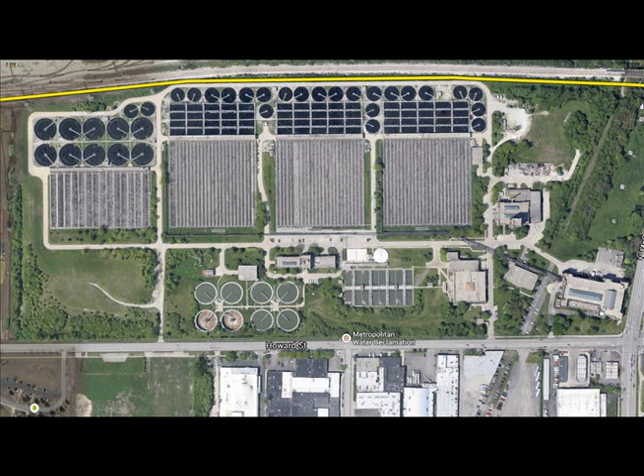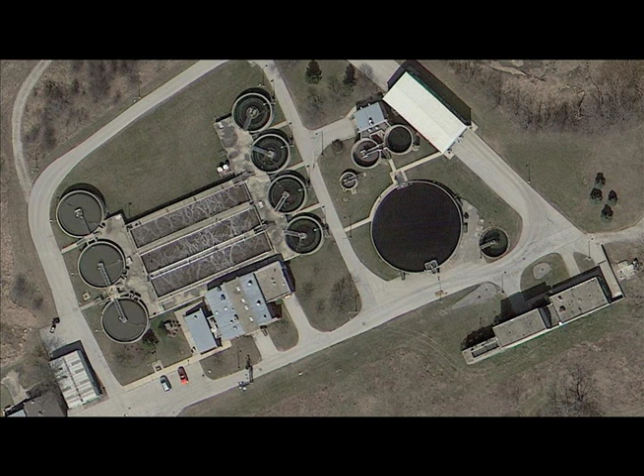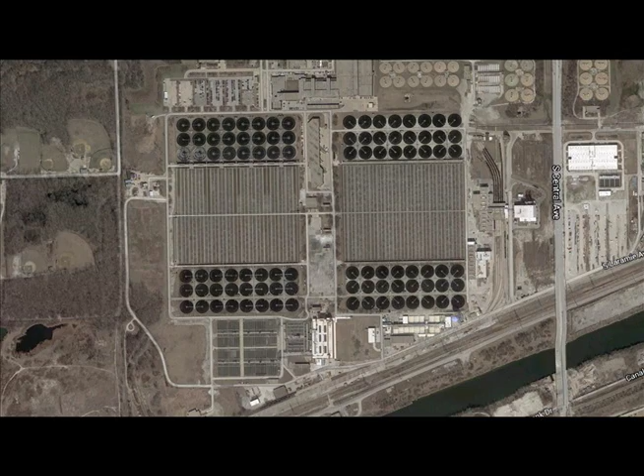The 7 wastewater treatment plants are the Northside or O'Brien plant in Skokie, Illinois, the Kirie plant in Des Plaines, Illinois, the John E. Egan plant in Schaumburg, Illinois, the Hanover Park plant in Hanover Park, Illinois, the Lemont plant, which is the smallest plant in Lemont, Illinois, the Calumet plant located next to Lake Calumet on the far south side of Chicago, and finally the Stickney plant in Stickney, Illinois, the largest wastewater treatment plant in the world.

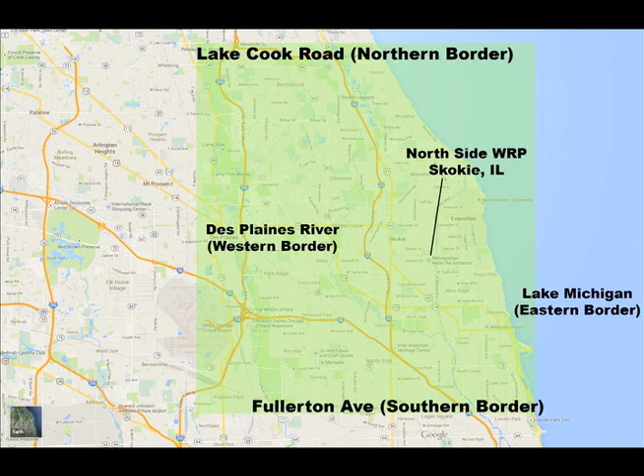The Northside Water Reclamation Plant is the oldest of the 7 wastewater treatment facilities within the metropolitan Chicago area. The main portion of the plant began operation in 1928 and was a model for modern sewage treatment technology as we know it today. The plant serves over 1.3 million people, residing in a 141 square mile drainage area, which includes the city of Chicago north of Fullerton Avenue and the northern suburbs to the Lake County border.

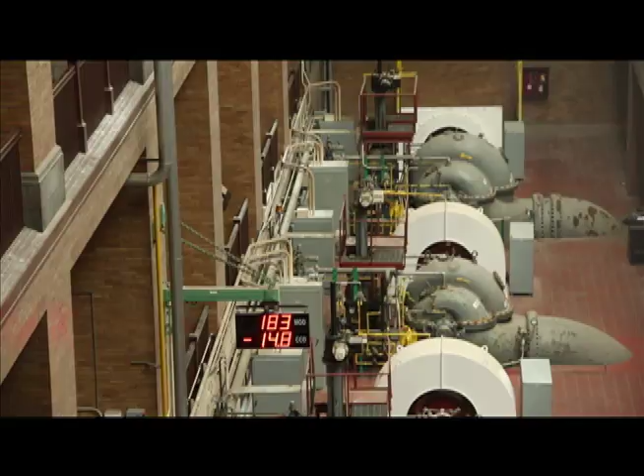The process of treating water goes through the following stages. First, the wastewater goes through a collection system where water enters the plant through the sewer system. Then, the wastewater goes through a preliminary treatment where waste is removed from the water. The wastewater then goes through a primary treatment where solids settle to the bottom while fats and oils float to the top and are disposed of.

Following that, the wastewater goes through a secondary treatment where aeration tanks pump air into the water to clean it. The treated water then goes through the last stage, or the final settling, where solids sink to the bottom and are sent to concentration tanks while treated effluent is discharged into the river and canals.

My name is Commissioner Frank Avila, and we're at the Terrence O'Brien plant, which used to be called the Northside plant. And I'm here with our tour guide, Tom Phillips. Tom Phillips is the person that gives the tours here at the Terrence O'Brien plant. And Tom, how long have you worked at the district? I've been at the district now for about 2.5 years.

And how long have you been a TPO? 2.5 years, the whole time. And what is TPO? I'm a treatment plant operator 1. I started as a vacation relief, and now I'm just a treatment plant operator 1, but I still give the tours here at the Terrence O'Brien Water Reclamation Plant. And Tom is one of the top tour persons here at the Metropolitan Water Reclamation District of Greater Chicago. He gives all the tours here on the north side, and we're going to go through a tour of the Northside plant, or the Terrence O'Brien plant.

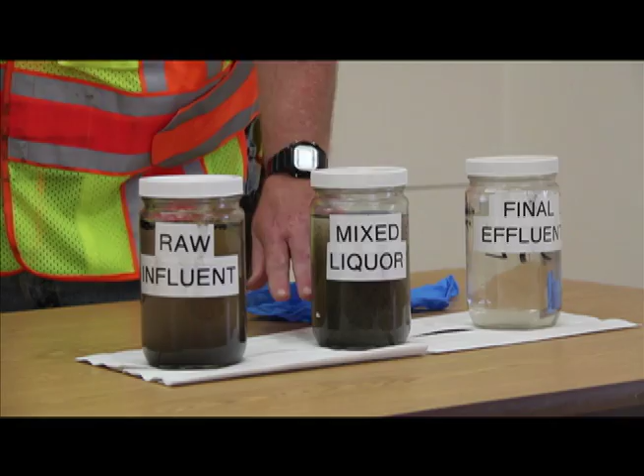We remove the settled material, and this is our final effluent. That's a very, very short version of what we do here, but that at 9:30 this morning is our final effluent, compared to this, which is the raw. It's a very, very efficient process.

Tom mentioned dissolved oxygen, because since we're working with liquid, with wastewater, the oxygen is dissolved oxygen. Whereas human beings need oxygen to breathe, the microorganisms need dissolved oxygen to survive in wastewater. That's why they introduce dissolved oxygen, and that's one of the key portions of treating our wastewater, inputting more dissolved oxygen into the system.

Yes, the microorganisms could not survive without proper DO. So part of my job as a treatment plant operator is to make sure the DO stays consistent and considerably higher than when it first comes into the plant. We're going to go through the various processes of how we achieve this, from the raw sewage to the effluent, and walk around the plant explaining it.

Okay, in this section of the tour I would show a video, a general overview of how the district got started, and I would also have a question and answer session, but that is not going to be the case right now. So I'll just show the video of the water reclamation.

Our goal is clear. The Metropolitan Water Reclamation District of Greater Chicago. For more than 100 years, we have been working to clean and preserve our water and natural resources. By developing technologies to control flooding and adopting policies that will protect the water environment, we make our communities a better place to live, work, and raise our families.

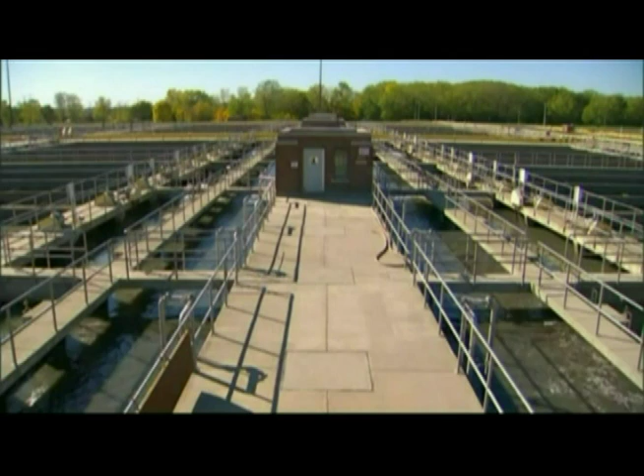The Metropolitan Water Reclamation District of Greater Chicago serves a population of 5.1 million people in the city of Chicago and 124 suburban communities. As an autonomous government agency, separate from the City of Chicago and Cook County governments, we treat an average of 1.4 billion gallons of wastewater every day, 365 days a year.

The staff of 2,100 men and women, under the direction of a 9-member Board of Commissioners elected by the voters of Cook County, includes engineers, scientists, operators, and various labor groups, all dedicated to continuous improvements in the quality of our water and environment.

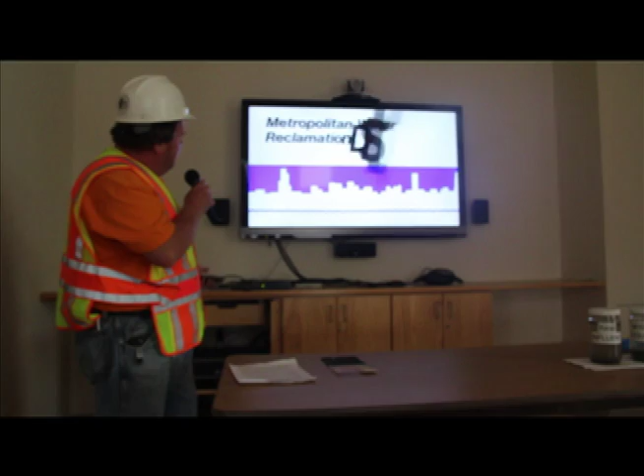Once again, this is a video that we show to all the tour groups. It covers the water reclamation of all Greater Chicago, not just the north side. There's a lot of good information in there about how we started, where we came from, and where we're going in the future.

The district consists of 7 wastewater plants. 3 are considered the largest in North America, and 1 is considered the largest in the world, which is Stickney Treatment Plant. When a tour group comes in, before they leave, I ask them to take some of the handouts we have over here at the Water Reclamation District.

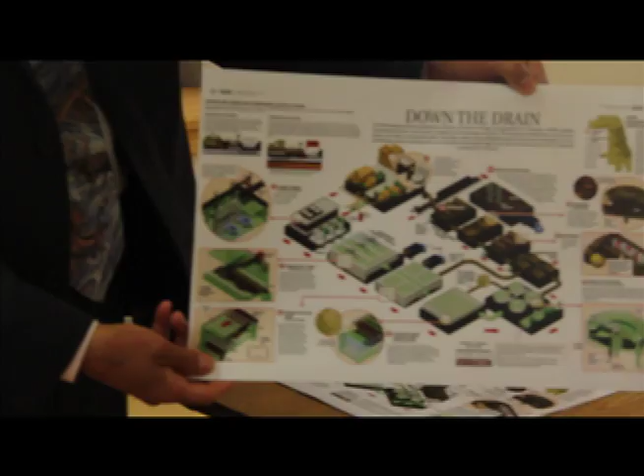This is an overview over here of how any treatment plant will work, not just ours. And this is for the grade schools. Sewer Science, very nice booklet. And then, you know, it's a toilet, not a trash can. And then a new problem that we're having, and I'm hearing a lot about, is drug-free drains. That could be a serious problem in the future, and it's becoming a problem right now.

Yes, as Tom mentioned, the drug-free drain is a problem, and they're always asking me, how do we keep this out of the system? And my answer is stay healthy, don't take it. Eat right, exercise, and if you're healthy, you don't have to take any prescription drugs. I think that's the only way to keep it out of the drain.

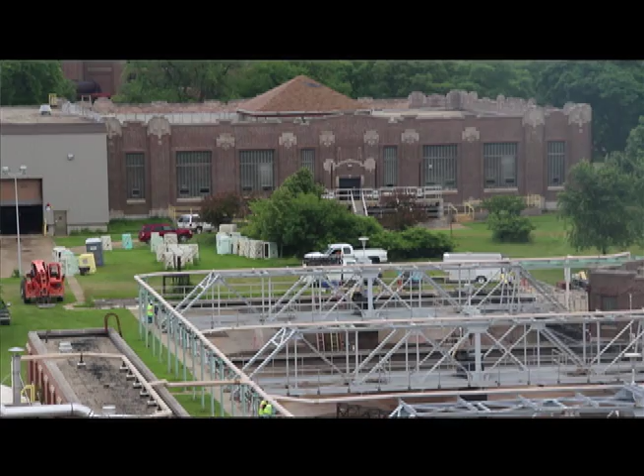Okay, we're good. Looking east over the O'Brien treatment plant, you can see the original 8 primary tanks, and then to the immediate left, you could see the concentration tanks where we settle out the solids and send the waste to the Stickney plant via a pipeline of 18 miles.

And then in the further distant horizon, you can see the grit building where we remove the grits and the fine screens. And off even more, a little bit to the left, is the original service building. It was built in 1927. That's where the trades primarily do their work.

And then the tanks that are to our left and down are aeration tank battery A and aeration tank battery B. The aeration tanks is where we do most of the biological process, and that's where we remove most of the organic solids. We accomplish in 4 hours what takes the fields and the streams 4 to 5 weeks.

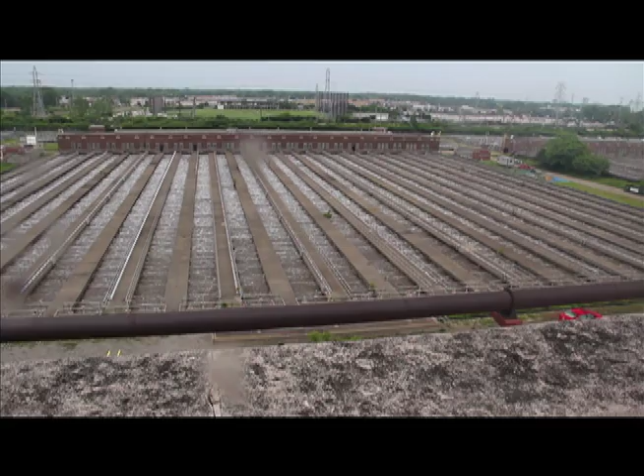This is looking north from the O'Brien treatment plant. We're looking at C aeration tank. This is a better view. You can actually see what's going on here. We're injecting air into these tanks, which is helping the biological process mix with the organic material we call food or sludge, and it's helping remove the organics, and this is the actual treatment process that would lead to the next stage of our treatment.

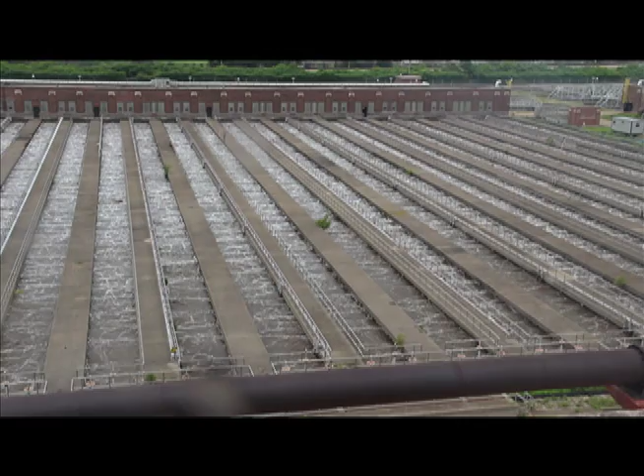Adding air to raw sewage at this point raises the DO, and the dissolved oxygen is very essential to the treatment process at this particular plant. In the west, you'll notice that the primary tanks are around here. These are the newer style primary tanks. This is looking west. We have a total of 16 primary tanks. These 8 are newer than the first 8 looking east.

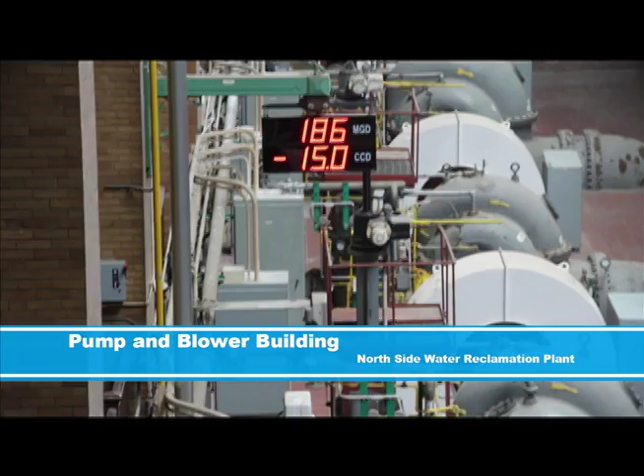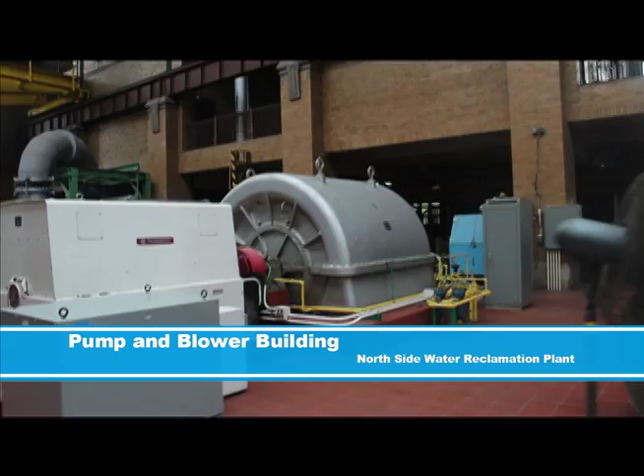The Pump and Blower Building is the first stop on the tour of the North Side Water Reclamation Plant. The Pump and Blower Building contains the main sewage pumps that lift sewage from the incoming sewers to an elevation that allows the sewage to flow to the rest of the plant by using the force of gravity, or gravity flow. This is also the building that contains the blowers that supply the compressed air to the aeration tanks.

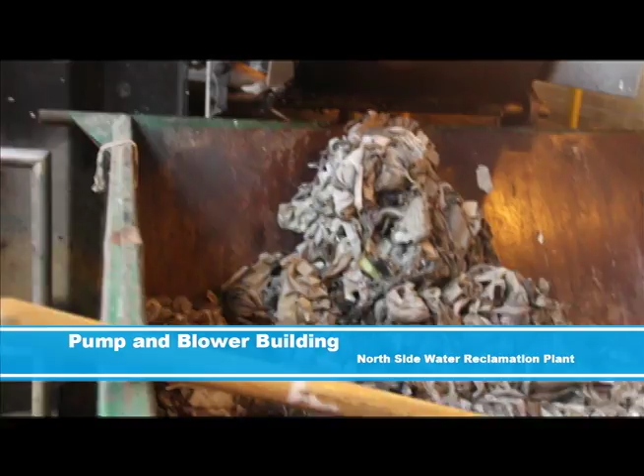The coarse screen removes large materials such as timber, plastic, and garbage from the incoming sewage. This is the first part of our walking tour. This is the pump and blower building. This is where the water comes in on 3 different channels from the city. This is the first part of the tour.

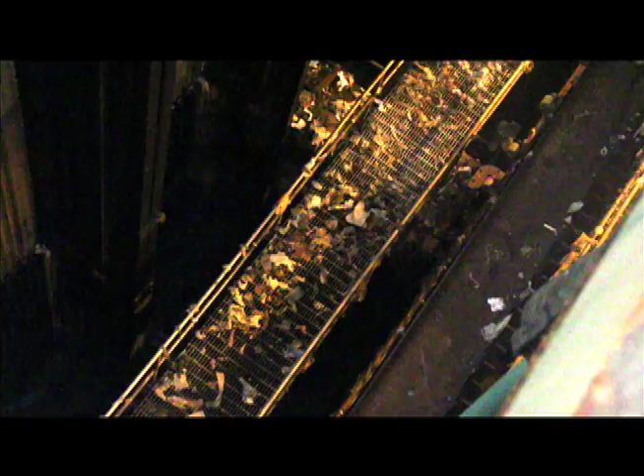This is where the water comes in and is introduced to a coarse screen where bigger material is removed from the water. Looking here is the coarse screen. We're removing the larger objects of the wastewater. That rake that is going down there very slowly is going to fall below that water line, and it's going to remove objects that are 3 inches or larger, and that's why it is the coarse screen.

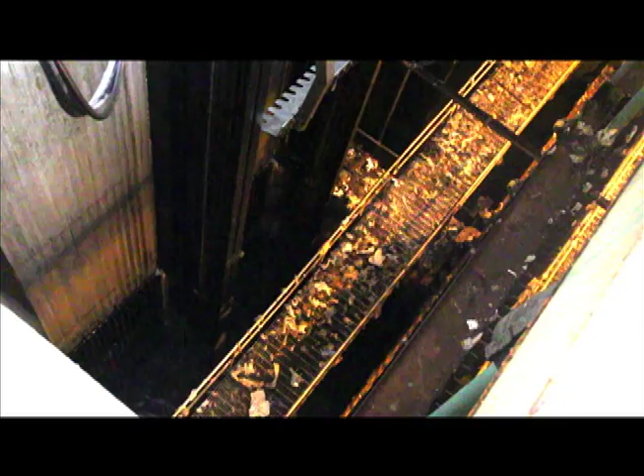In another building we have a fine screen, but in this particular part of treatment, this is where we're removing the larger pieces of wood, rocks, and larger items. And we're at low flow right now, meaning we're only going to use one screen. But if we were at high flow, all these particular rakes would be on and we'd be removing that debris.

So Tom, this is the first step of the treatment process where the wastewater, as I mentioned, is a combination of the two P's, poop and pee, all the rain, when it hits the ground, it goes into the sewer, it comes in here, and all your industrial waste. This is wastewater. That is correct, Frank, and like I said, this is the very, very first process as it enters the building from the city.

And from this point on, we're going to go into another section of the building. We're going to raise this water level up 40 or 50 feet using sewer pumps, one of six. And then the whole treatment process is going to be gravity fed from that point forward. Very interesting step. What would be the next phase? Very interesting, Tom. This is the pump and blower building where we have our pumps and our air compressors. We just simply call them blowers.

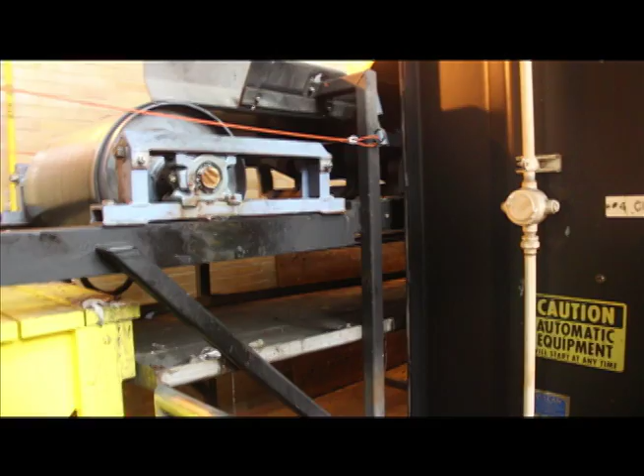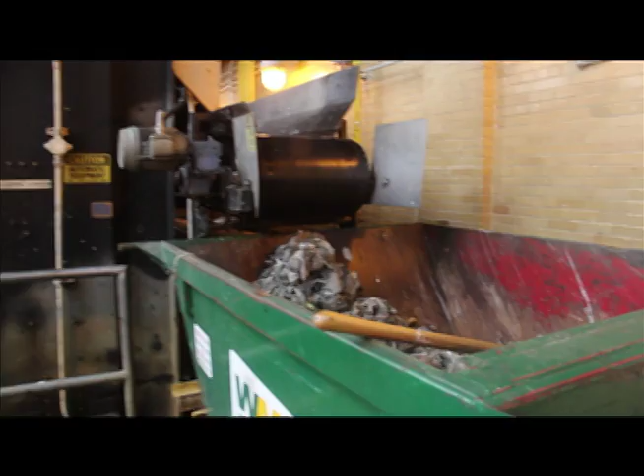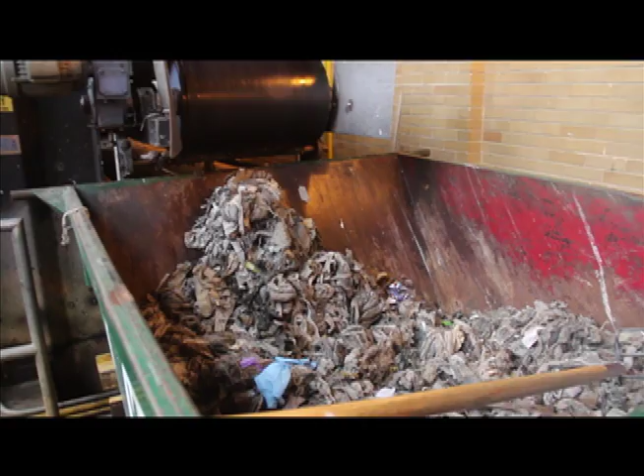We're going to go into the pump and blower part of the building. It's the same building but a different section. This is where the storm pumps are going to raise that water level I spoke of earlier up about 40 or 50 feet, and then the water is going to be gravity fed through the system from that point. It's very noisy in the next room. There's also air compressors, which we call blowers, in the next room.

See, now if I spoke, I wouldn't even know if you would hear. Okay, you try, but hold it like this. Okay, just give me a nod.

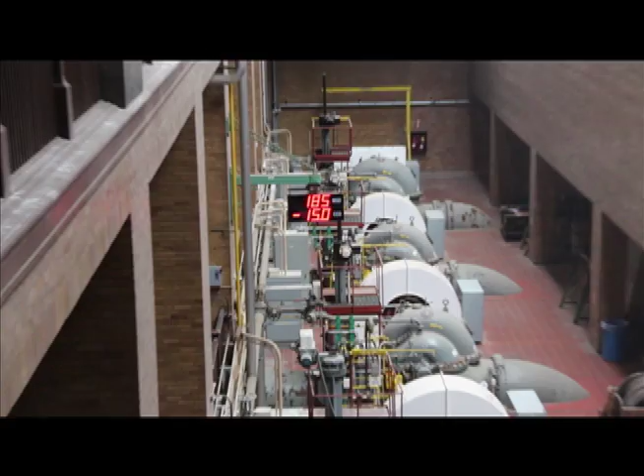Right now, we're looking at the pump section of the pump and blower. This is bringing the wastewater up like 40 or 50 feet from where it was the last time you saw it. And now it's going to be gravity fed through the plant. At this particular time, we're handling 185 million gallons a day, which is a rather low flow. There's no rain event. That's low for us. And at this time, we have only two pumps on.

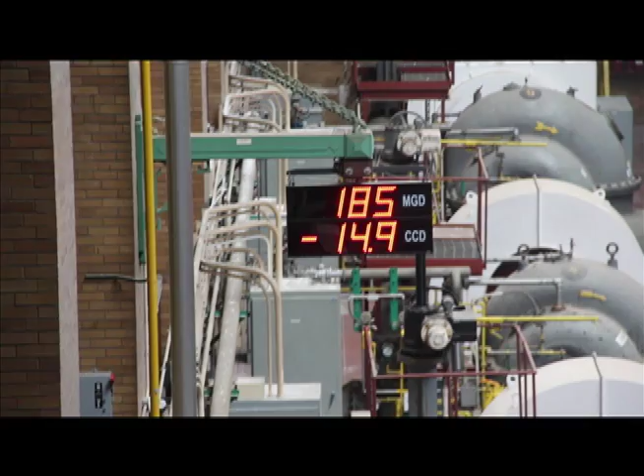And if you can pan to the right, the big white and silver machines over there are blowers. That's what's supplying our plant with compressed air for all our aeration tanks and all our controls. And there's seven of them, and right now we have three of them on.

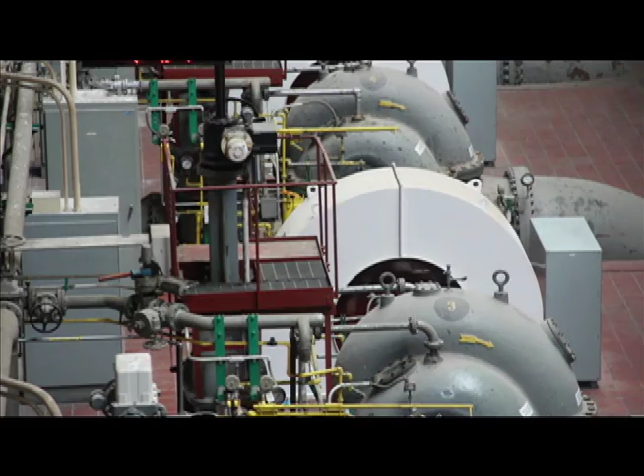I'd say, get a lot of footage. I'm saying it's raising about 40, 50 feet.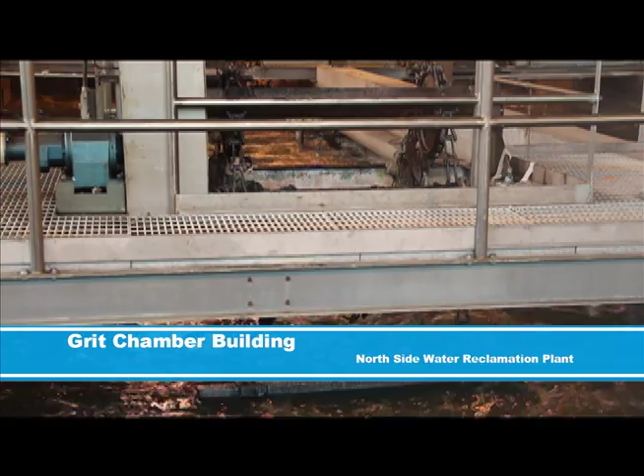In this building, the sewage flows through the aerated channels at a slower velocity than it does in sewers. Because of the slower spiral flow, heavier inert materials such as cinders, sand, eggshells, and other smaller wastes settle out. This material is pumped out and disposed of in private landfills.

At the end of the grit channels are fine screens that trap rags and other material that could clog small pumps and pipes. We're coming in now to the grit building. Here we're going to remove all the sand, the rocks, and heavy solids that have accumulated in the wastewater. Also in this building we have the fine screen, which is another process after grit removal, on the other side of this building.

The first thing we're going to see is 6 tanks where we'll be removing grit, and you'll notice the water level is much higher now. The pumps we saw earlier have raised that water level up so that the entire treatment plant process from this point on is gravity fed. I'll explain more on the inside.

The first thing Tom showed us was the coarse screen, with 3-inch openings. It collected all the heavy debris that doesn't pass through. The screen picks it up and dumps it into the dumpster. Then it went into the pump and blower room, where it pumps the wastewater up from 40 feet below as it comes into the plant. From there, gravity flow goes into the grit room, and from this point on everything is gravity fed. The first part of the process is grit removal, which happens in these tanks here.

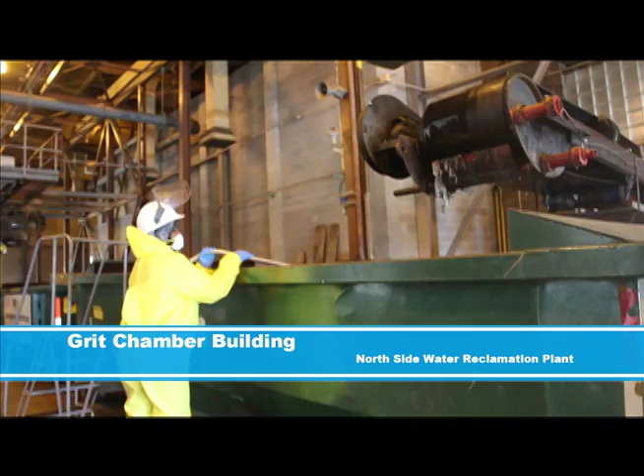Let's go to that tank over there. If you want, shoot down in there. Let me get some light in here.

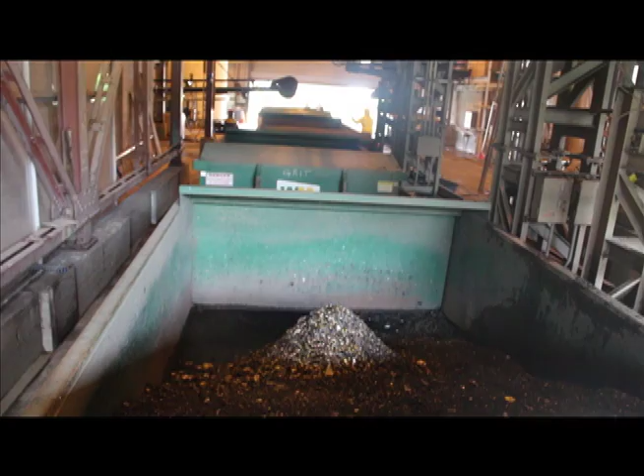In the grit removal water tank we saw shortly ago, I was telling you about removing the grit. Well, this is the dumpster where the grit ends up. It's mostly sand, coal patch, rock debris, bits and twigs—stuff that's primarily out of the storm sewer more so than the waste end of the treatment process, but it has to be removed and disposed of properly. This is what we call grit.

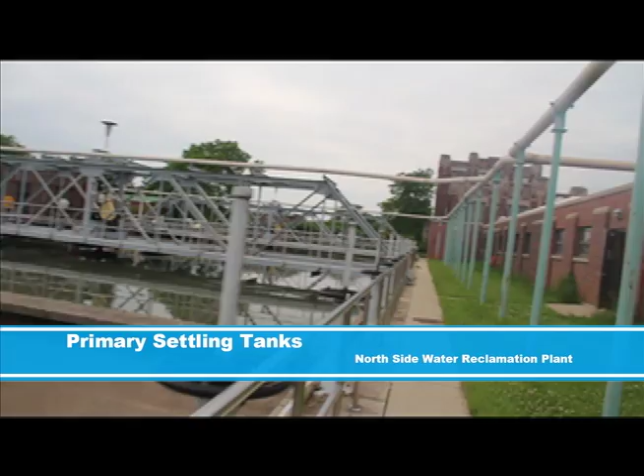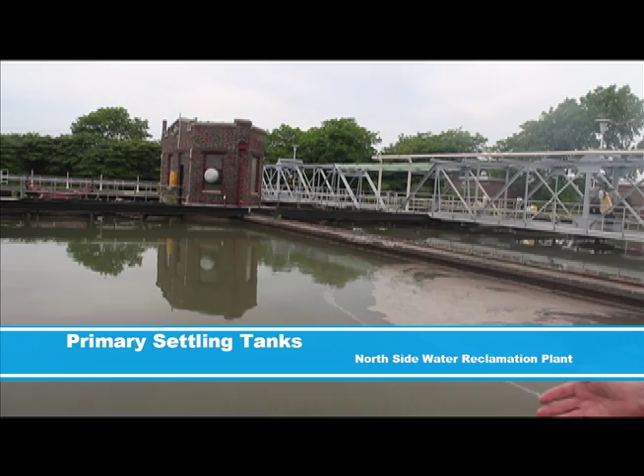This is where the heavier decomposable solids are settled out of the raw sewage. These tanks hold the sewage in a relatively quiescent condition for a period of time to allow settling. Approximately 20% of the suspended solids, which are impurities in the sewage, and the oxygen requirements are removed here in the form of primary sludge.

This sludge is then pumped into the concentration tanks, which provide sludge storage at the Northside plant. Here, sludges from the primary tanks and waste-activated sludge from the final settling tanks are allowed to settle and compact under their own weight. The sludge percent solids increase slightly before it is pumped approximately 18 miles to the Stickney Water Reclamation Plant.

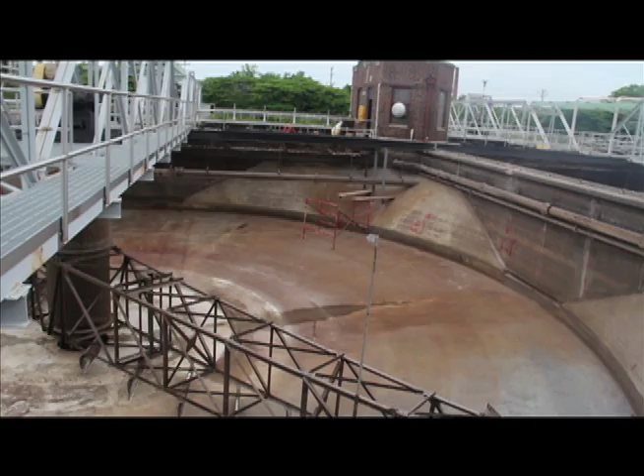This is primary tank 2. It's down for some routine maintenance, so as you can see, it's empty. But this is how the operation works: in the primary tanks, that metal apparatus turns very slowly clockwise, and those little paddles push everything to the center of that hole, which will be organic. In this particular tank, it will be organic sludge.

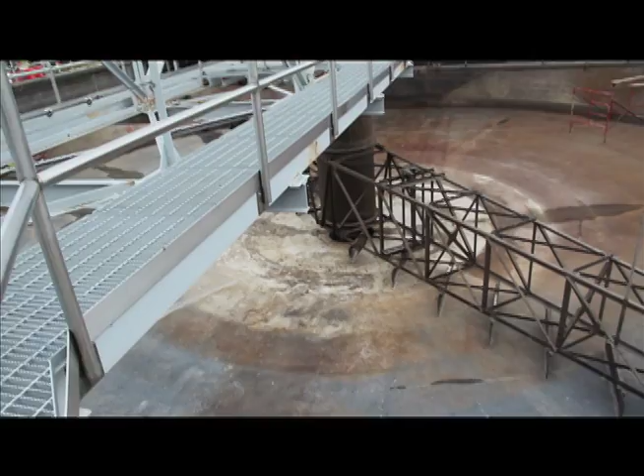Also in this tank, you'll see in an operational tank how the grease, fats, and oils rise to the top and then get skimmed off at the other side. So in the primary section of treatment, we're removing fats, grease, and oils from the top, and we're collecting our sludge and transferring it elsewhere. We have 8 old tanks and 8 new tanks, and this is one of the older tanks that is under a little maintenance.

Okay, this is an operational primary tank. At the far end you see a silver metal flag moving slightly from left to right—that's telling me the plow at the bottom of this tank is doing what it should. It's moving very slowly, collecting all the organic solids and shoveling them off to the center, and we're going to save a lot of the organic solids in our treatment process.

At the far end, the grease, fats, and oils are skimmed off, then removed and pumped into this building to be disposed of properly. We have no use for the grease, fats, and oils in the treatment process at all—it's removed and disposed of. Then the remainder of the effluent goes out into the aeration tanks—all 16 of them—distributed equally to all 4 batteries of aeration.

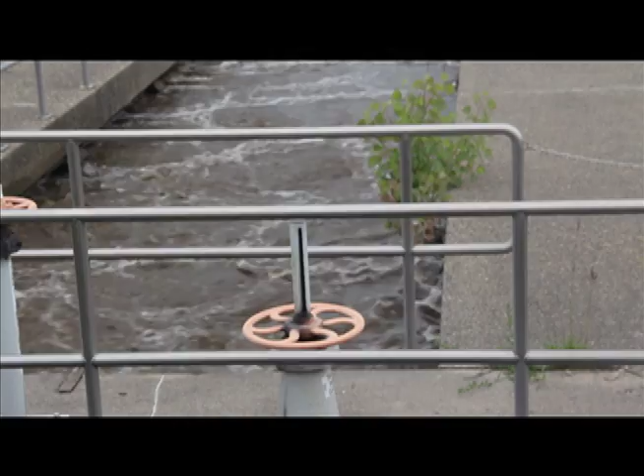The air from the blowers is needed because the bacteria require oxygen for respiration. Bubbling the air mixture of sewage and sludge, called mixed liquor, provides this oxygen while agitating the mixture to keep the solids in suspension. This is the aeration tank.

This is aeration tank B. This is where the biological process takes place. This is where we're introducing air for the first time to help the organics increase the dissolved oxygen, to help the organics and the microorganisms remove the organic solids. And then when they're done removing the organic solids, they actually remove themselves to a certain extent.

This process here, like I said before, in 4 hours we can accomplish what the fields and streams do naturally just by adding air, dissolved oxygen, to these tanks. We can do in 4 hours what takes fields and streams 4 to 5 weeks.

At this point, we're keeping everything very turbulent. We're making sure nothing sits still. We're adding as much air as possible. At low flow daylight today, it'll run its cycle for about 4.5 hours, and then it'll go to the final tank, which will be the clarifiers, also known as final tanks, beyond those buildings, and that would be the last stage at this point of treatment. But right now, this is the aeration, and this is where we introduce air for the first time.

So here we're introducing dissolved oxygen to help the good microorganisms live.

Tom, you're up. So Tom, as you mentioned, they're injecting dissolved oxygen into the aeration tanks here so the microorganisms could live. And at this process, they're eating the bad bugs? At this process, they're eating the organic solids, which is what we want them to do, and they're getting very energized with the dissolved oxygen, and at some point they could actually eat themselves. I see. So actually what it is, the good bugs, microorganisms, are eating the bad bugs, the bad microorganisms here in the dissolved oxygen. And as I mentioned, we need air to breathe, and that's why we have to generate more air in our body. That's why Tom, I think, ran this morning about 10 miles to improve his oxygen in his body.

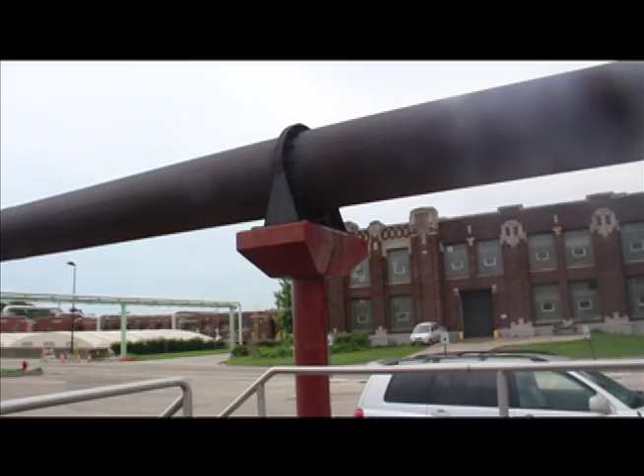They're all controlled primarily with the air, and these big brown pipes from the pump and blower building bring all the air, and they're controlled by these valves, and also controlled by us in the TPO office on how much air we're going to add to the tanks. And that's what that brown pipe is for.

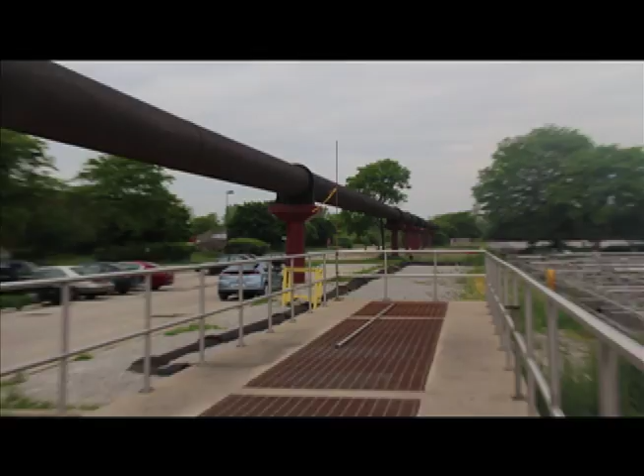But you may also notice a brown pipe that's below them on the ground. That pipe there is return sludge. When we're done with the clarifiers or the final tanks, we want to keep some of the good bugs and some of the good sludge, and we want to bring them back here because they're still healthy, they're still doing what we want them to do, and we don't want to send them all to waste. So we send them back to what we call the head of the plant through that particular brown pipe, to the head of the aeration tank, and simply reuse them. That would be called return sludge.

This is where the mixed liquor from the aeration tanks is held in a quiescent condition to allow settling of the floc. The sludge which settles here is pumped back to be mixed with the incoming sewage at the beginning of the aeration tanks. Part of the sludge from the final tanks, which is excess cellular material, is split off the return sludge and disposed of to the concentration tanks.

The overflow of the final tanks is the reclaimed water. The final effluent is discharged into the North Shore Channel, which flows into the Chicago River. This is one of our clarifiers or final tanks. This is the last stage in our treatment process as it stands right now.

That'll change with the UV disinfection in a year or so. As you can tell from the center of this tank, the wastewater coming in is a little browner. That's coming from our aeration tanks, where the air was mixed with all the organic solids, creating a very turbulent effect.

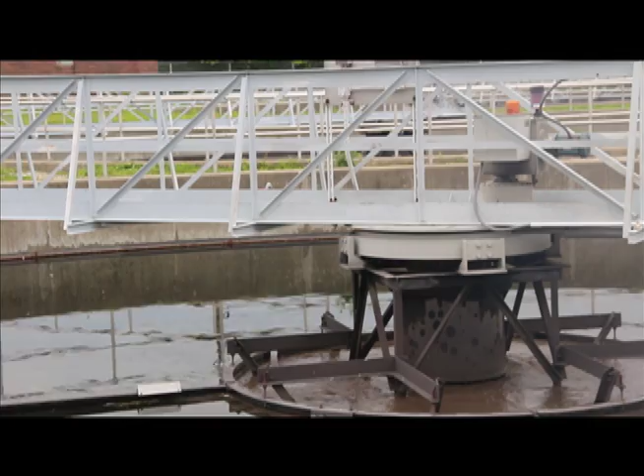You can see it's coming in murky brown, but as you can see when it's leaving, it's in a much clearer state. This is what it looks like when it's leaving the final effluent, which is much clearer, and that's what we're going for. We're trying to clarify it.

What's going to happen at this particular plant in a year or so is after this final effluent stage, it's going to go to a UV disinfection building where it will be disinfected as well as purified. The water leaving our plant after that will actually be clearer and cleaner than the water in the river it's going to, and hopefully that'll be by the end of the year.

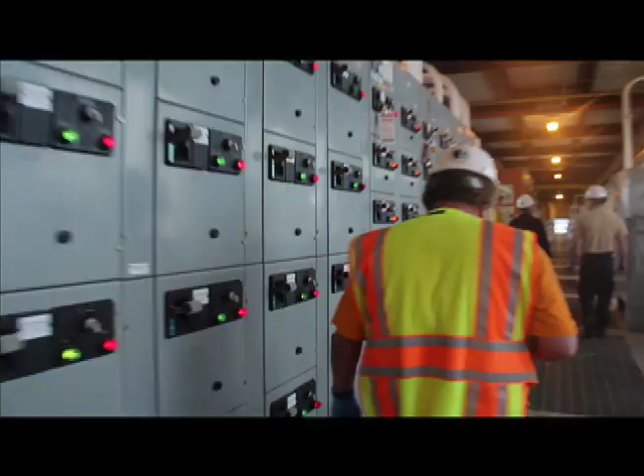Yeah. Well, I was going to say...

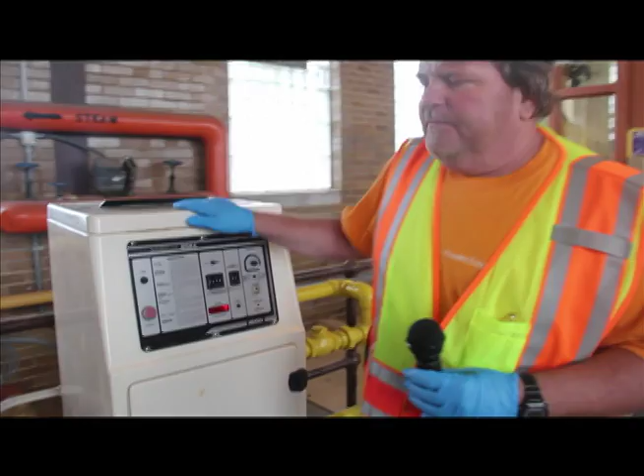Part of my job as a treatment plant operator is -- are we live? Part of my job as a treatment plant operator is we run 24 hours here. We want to constantly monitor our samples that we send to our lab and to another lab for analysis.

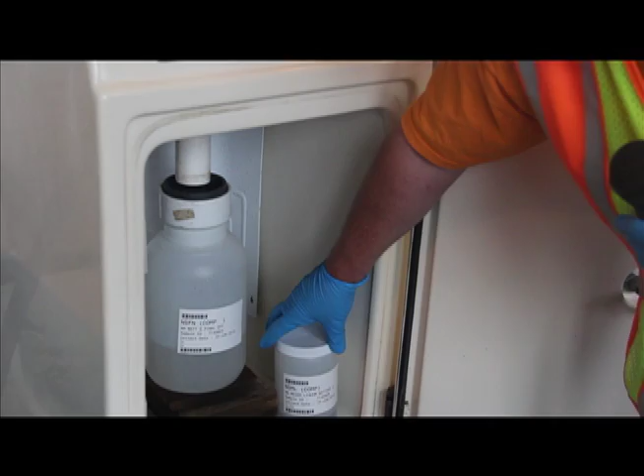This is a sample station. This particular station takes a final effluent for this battery. The sampler every once in a while will dump a certain measured amount of sample and we'll get a 24-hour composite. We then send this to another lab to have it analyzed for dissolved solids and various things you look for in treatment.

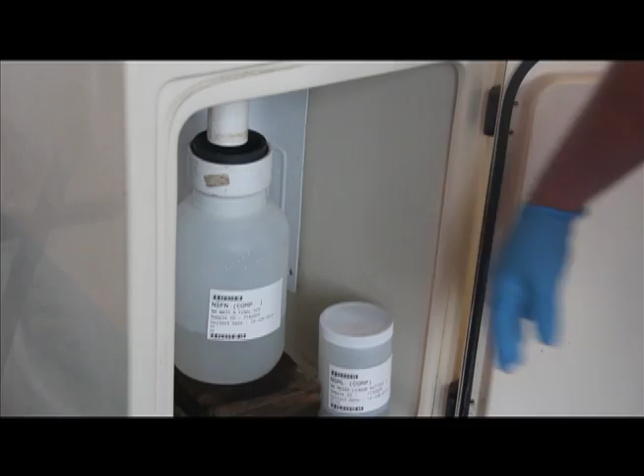Also, this is refrigerated. Every shift takes a 1/3 measure of mixed liquor, and at the end of the midnight shift, we do an analysis on this to see how our bugs are reacting and how healthy they are. So that is mixed liquor.

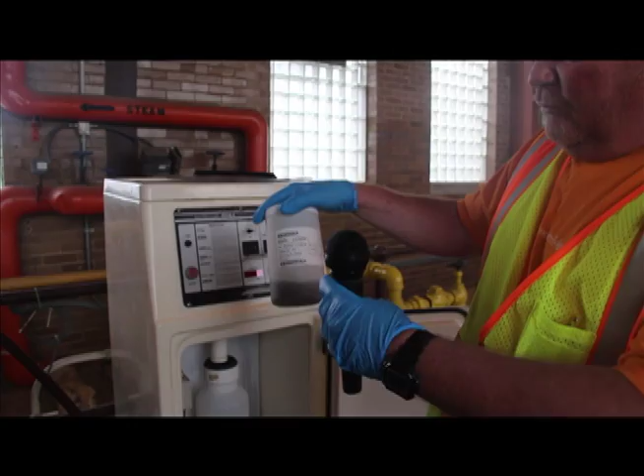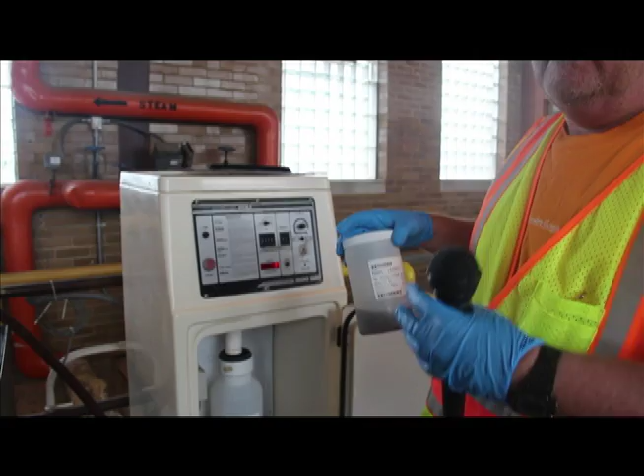This was the brown murky stuff that I showed you in the final tank. We settled it out, but we're going to save it because it's loaded with microorganisms from the morning shift, then the afternoon shift, and then the midnight shift. We'll do a sample and see how healthy they are, 24 hours a day, every day, to make sure our bugs are getting enough oxygen, they're healthy, and doing what they need to do.

So what you're doing here, Tom, is making sure that the people in Cook County -- you're protecting their health and welfare. This is what the Northside plant is doing: protecting the health and welfare of the residents of Cook County.

Yes, sir, and we're making sure that our effluent is as clean as humanly possible, and it's going to get cleaner with every improvement in the treatment process. This is a very efficient system, and most water treatment plants use a very similar system.

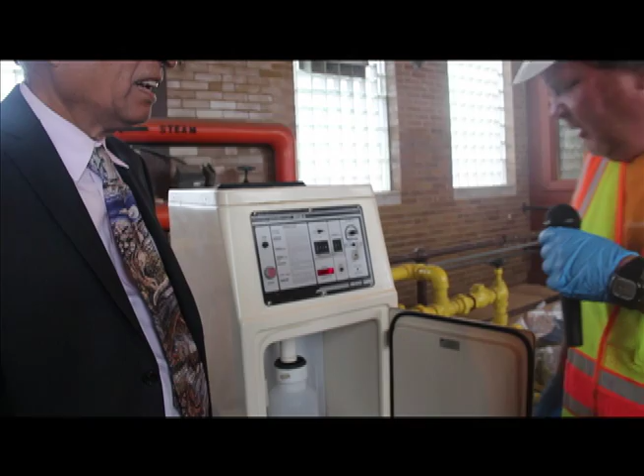Tom, you have a very important job. Yes, I do, and I really enjoy wastewater treatment. It's very interesting, and it's a good occupation. Your position is a TPO, treatment plant operator 1 -- a very important position here at the north side plant.

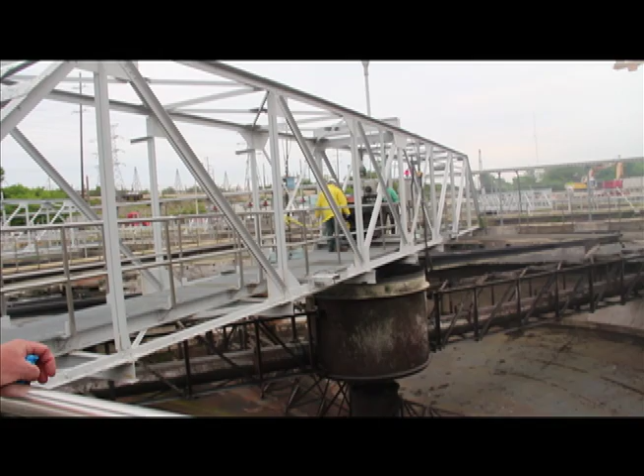This is final tank A1, which is shut down for service right now. It's very similar to the primary tanks, a little smaller plow, but it moves the same way. The mixed liquor, or the aeration water, will come up through the center and settle out. It sits in the tank, like I said earlier, for about 3 to 4 hours, and all the return sludge will be moved very slowly by that plow to the center hole where it will be reused.

We actually only waste less than 10% of our return sludge. We just send it back to the aeration tank, energize it again with a little more dissolved oxygen, DO, and keep the bugs and microorganisms healthy. They just keep doing for us what they need to do: settle out the solids, and then we send clean water over the weirs.

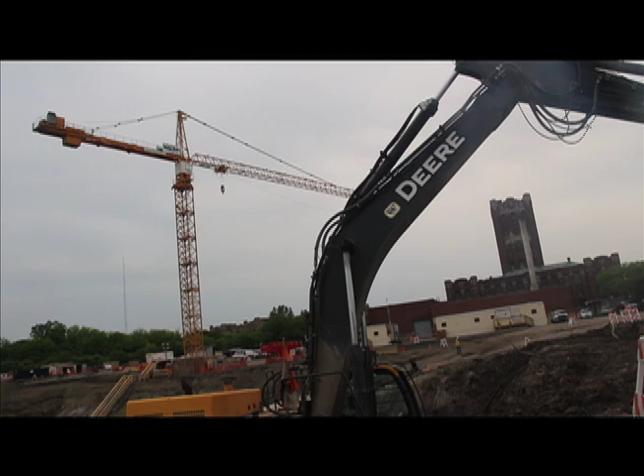One of the newest features in the Northside Water Treatment Plant is an ultraviolet disinfection system, which will be an added addition to the water treatment process. The disinfection system is slated to be completed by December 2015 and in full operation by February 2016.

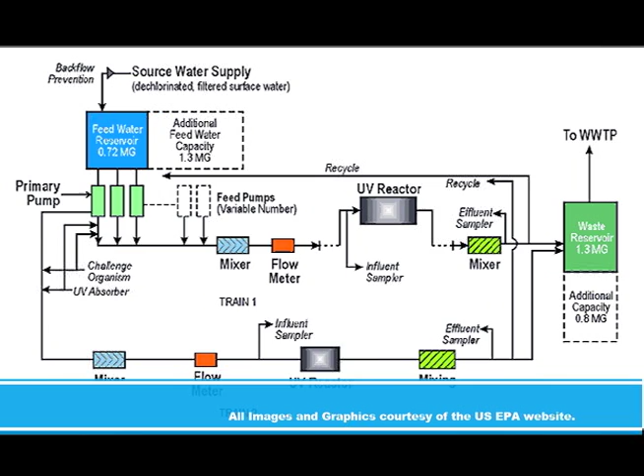An ultraviolet disinfection system transfers electromagnetic energy from a mercury arc lamp to an organism's genetic material. When UV radiation penetrates the cell wall of an organism, it destroys the cell's ability to reproduce. UV disinfection is effective at eliminating most viruses, spores, and cysts.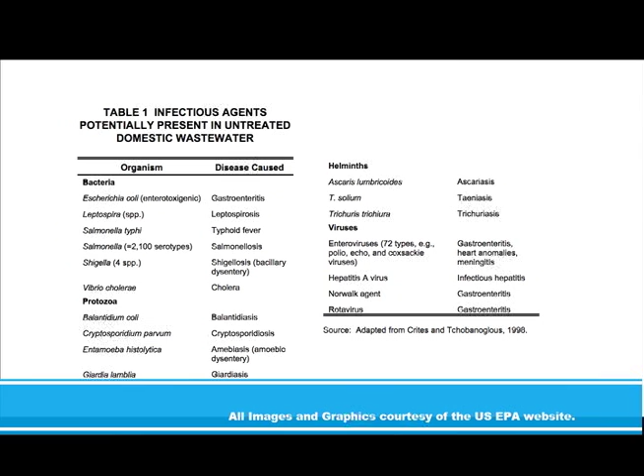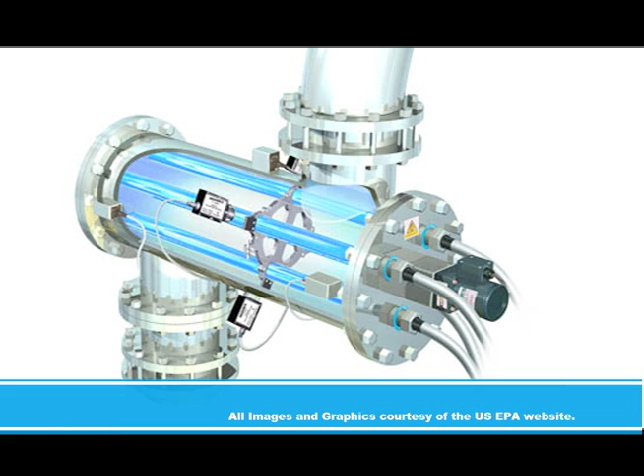UV disinfection is a physical process rather than a chemical disinfectant, which eliminates the need to generate, handle, transport, or store toxic, hazardous, or corrosive chemicals. There is no residual effect that can be harmful to humans or aquatic life. UV disinfection is user-friendly for operators. UV disinfection has a shorter contact time when compared with other disinfectants. UV disinfection equipment requires less space than other methods.

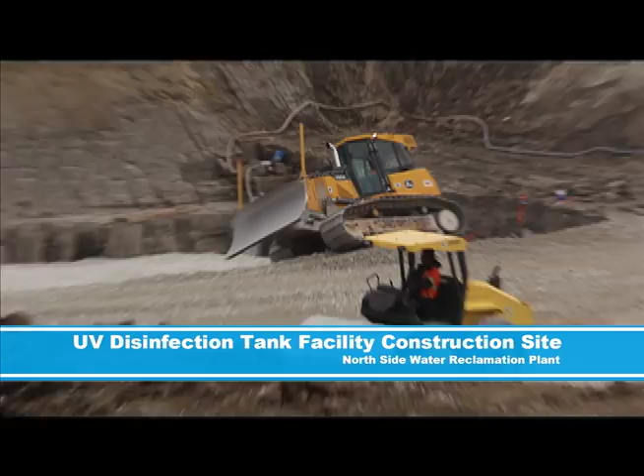Disinfection is considered to be the primary mechanism for the inactivation or destruction of organisms to prevent the spread of waterborne diseases to downstream users and the environment. It is important that wastewater be adequately treated prior to disinfection in order for any disinfectant to be effective.

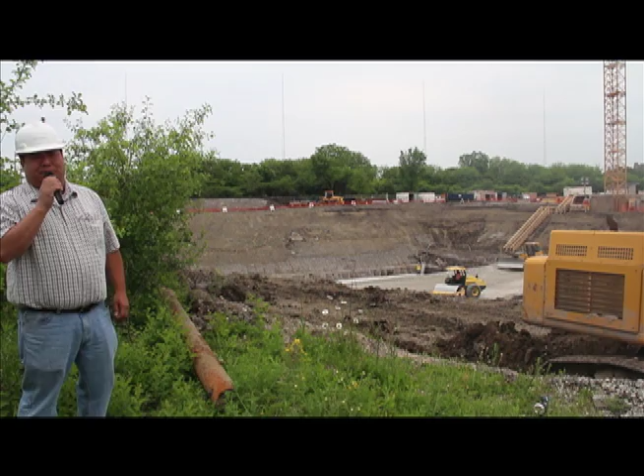So we're looking out here at the site of the future UV disinfection facility for the O'Brien plant. The facility is going to be designed for the full capacity of 450 million gallons per day. What you see is just a big hole in the ground, but they've had to remove about 30 feet of soil to get to the level where they need to start construction at the base of the facility. So you see a lot of excavating going on, and you see stone going in.

So hopefully in the next few months or next few weeks, we'll start to see the base of the foundation started, and then by December 2015 the building should be complete, and we should be ready to disinfect our effluent going into the North Shore Channel for the 2016 season. And Arush, right now the effluent is treated for secondary contact. Once they run the effluent through the ultraviolet light process, then it's going to be primary contact. Yes, the effluent standard will be to the primary contact standards. So for fishable, swimmable.

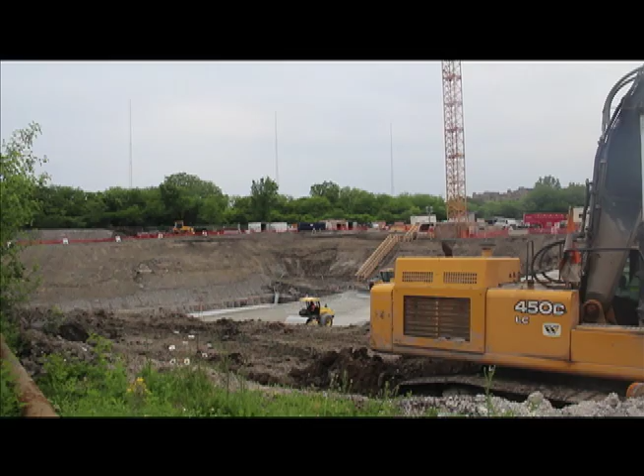And so we're doing ultraviolet light here at the Northside plant, and you mentioned it'll be completed in 2015 in September. December 2015 construction should be complete, and then the facility should be online and treating in March 2016 for the waterway season. And this will be discharged into the North Shore Channel.

All right. What we're looking at now is the covered tanks in front of us. Here are the concentration tanks. What happens here is we're collecting the primary sludge from our primary treatment process and our waste activated sludge. Those are the extra bugs and microorganisms we didn't need in the activated sludge process, and we're concentrating them and we ship them to Stickney via pipeline. We have a 16-inch pipeline that's roughly 16 miles long that goes to the Stickney Water Reclamation Plant from here, and we send them about 3 million gallons per day of sludge for processing in their digesters.

And the balance of the sludge you keep here to recycle to be used again in your processing here in your aeration tanks and in your preliminary tanks. Yeah, most of the sludge from the activated sludge gets recycled back into the head of the aeration tank for treating more sewage, basically. So we recycle most of our sludge here. It's an ongoing, continuous process.

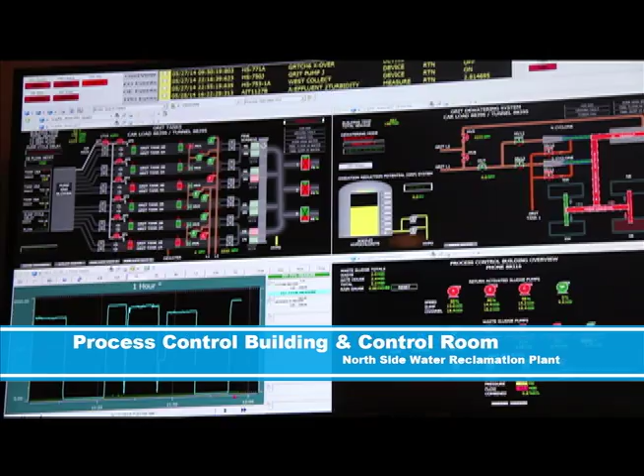The main administration building houses the control center for the Northside plant. The control room is where plant operators and technicians monitor all the facilities at the Northside plant. There are at least 1 or 2 people inside the control room at all times to make sure that all the buildings and machines are functioning properly. The latest computers keep track of all the facilities to make sure they are all working properly. If a machine is damaged or malfunctioning, engineers can be notified and be sent to fix the problem.

Okay, we're in the control room over here at the O'Brien plant, and this is where we monitor the treatment process. Every stage of the treatment process is monitored from this room, as well as the room you saw earlier with the pumps, with the operating engineers. This is where the treatment plant operators do their monitoring, and it's manned 24 hours like the other room.

On this particular screen here, we can go from screen to screen, but this particular one is monitoring the dissolved oxygen in our aeration tanks. Very important process. We have a screen set up for that. We're always monitoring, making sure we have the proper levels.

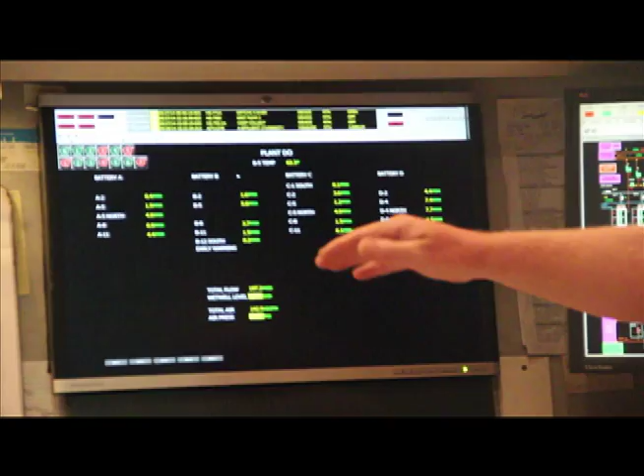And on this particular screen, I could change the returns. I mentioned earlier in the video about the return sludge and how much we can return. We can monitor that simply from clicking a mouse. I can change it. Each individual tank is individually controlled, so we can control it. And there's 4 batteries with individual tanks.

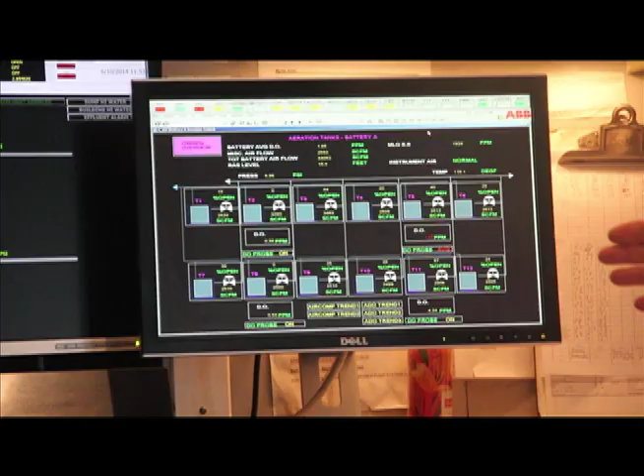The screen over here to the left is monitoring the process water building. This is how much we're sending out, and the temperature and the DO. I mentioned DO many times, dissolved oxygen. And our DO leaving the plant at this particular minute is 6.0, 6.1, which is very good DO for a treatment plant process.

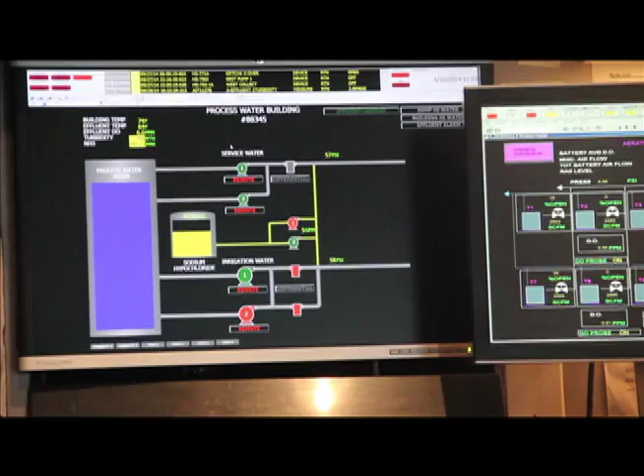Considering this morning when I came in, the raw water was 0.3. So that's how much dissolved air we added for our bugs to be healthy, to do what they need to do in the treatment process of activated sludge. So our DOs are very healthy, got very good healthy bugs. And once again, this is where we monitor it 24/7. There's always someone in this room. And that's how we do it here at the O'Brien plant.

Thank you very much. My name is Commissioner Frank Avila. We just completed a tour of the Northside plant, but it's now called the Terrence O'Brien plant. And so anyone that wants to come out and get a tour here at the Northside plant could contact our Public Relations Department, and we'll be happy to plan a tour for anyone that wants to tour the Northside plant. Please give us a call.

Thank you. We're going to talk a little bit now about one of the outlying stations here, the North Branch pumping station. You see one of the control screens for North Branch. North Branch is a pumping station that serves about 16 square miles in the city of Chicago. Basically, it's a pumping station that lifts flow from that area and puts it into an interceptor that comes to the O'Brien plant.

It also is a combined sewer overflow, a CSO point for that area. So when the flow into the station exceeds what can be pumped out into the interceptor system, it'll discharge a combined sewer overflow into the North Branch of the Chicago River and provide relief there to prevent flooding in that 16 square miles of Chicago.

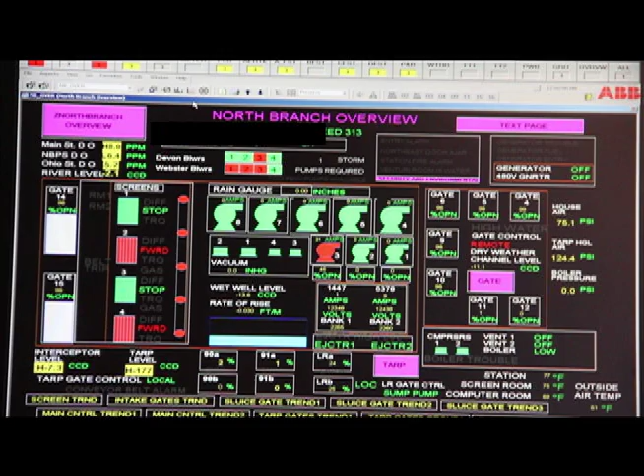The station is also part of our TARP system, the tunnel and reservoir plan. There are control structures, so before we go to the river, we can divert flow into the deep tunnel system and store that combined sewer overflow to prevent the discharge of pollution into the river for as much as the capacity is available in the tunnel. And once that tunnel capacity is reached, there's no other choice to prevent flooding in the area other than to discharge the combined sewer overflow out into the river.

Also with TARP, during high rain event levels, we can detour a lot of our water from the Northside O'Brien treatment plant to the TARP or the deep tunnel project, whatever you want to call it. TARP is a tunnel and reservoir plan. TARP is just an acronym.

But also, a reason for TARP is if we were to get hit with an industrial waste hit of some kind that came into the plant and we noticed it on our screens, we could detour that particular flow with that particular contaminant to TARP to be treated later, and it won't go into our system and it won't go into our river. That was one of the advantages of having a TARP system.

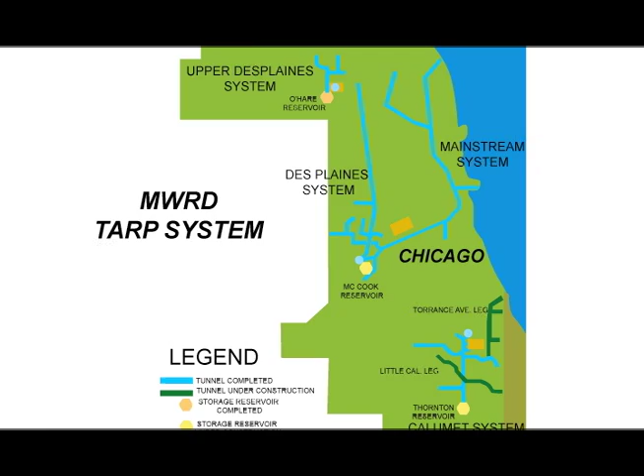The Northside plant has a maximum treatment capacity of 450 million gallons per day. Flows in excess of this capacity, resulting from rainfall in the service area, are diverted into the TARP tunnel system for later treatment. Diversion of combined stormwater and wastewater into the waterways occurs during very large storms when the 1 billion gallon storage capacity of the TARP system is exceeded.

The commissioners, engineers, workers, and residents of the Metropolitan Water Reclamation District of Greater Chicago continue their goal to keep our water supply healthy and clean.